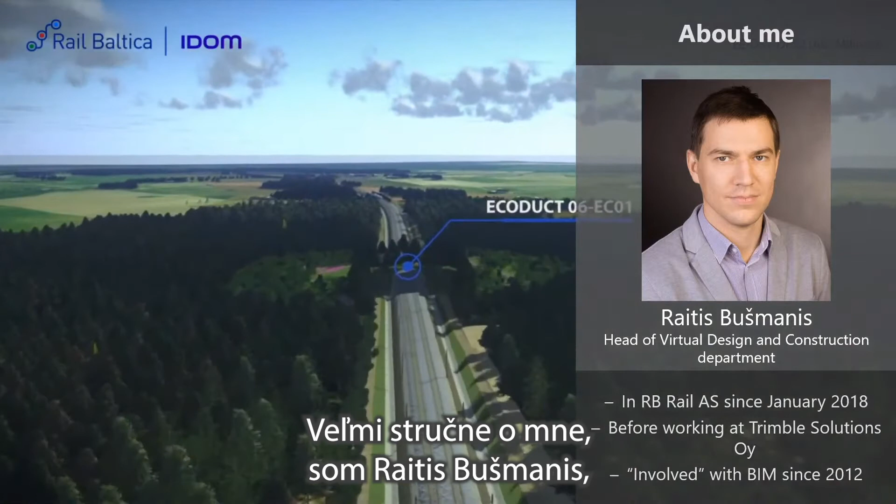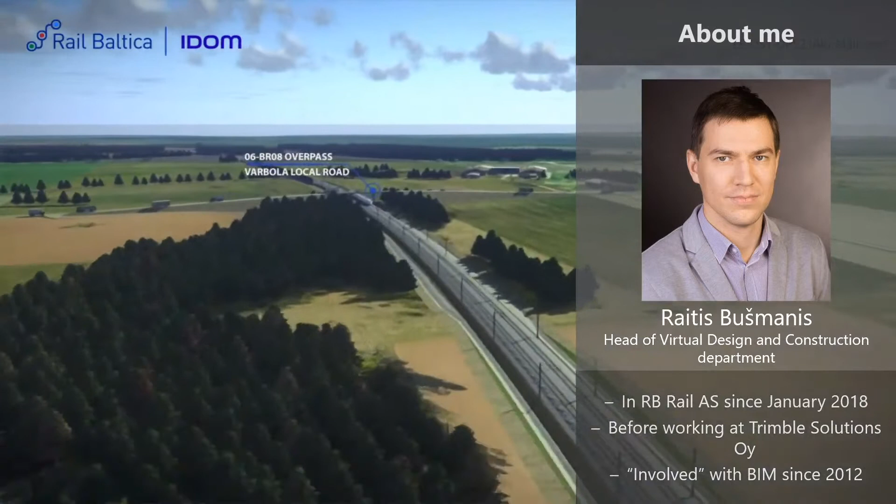It does, great. So very briefly about myself, I'm Raitis Bušmanis, head of virtual design and construction department in RB Rail, who is the coordinator of the whole project. I'm there since January 2018, and before that gained knowledge in Trimble Solutions and also working locally with different BIM tools all around.

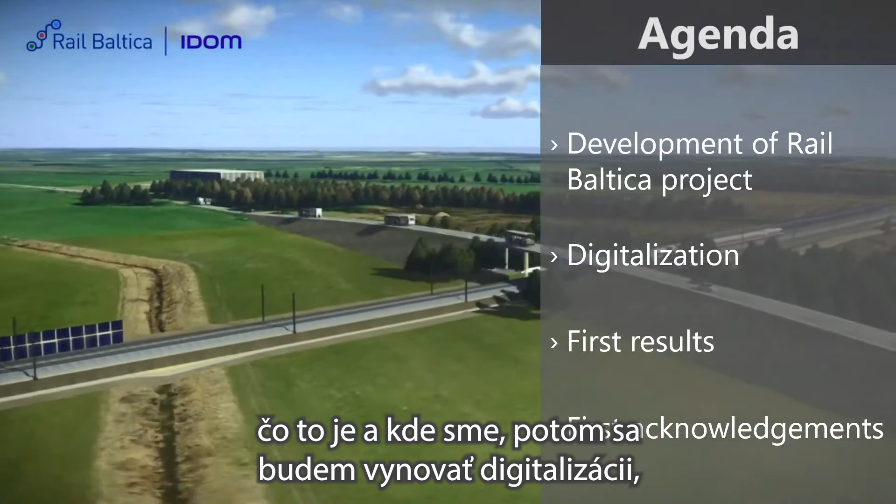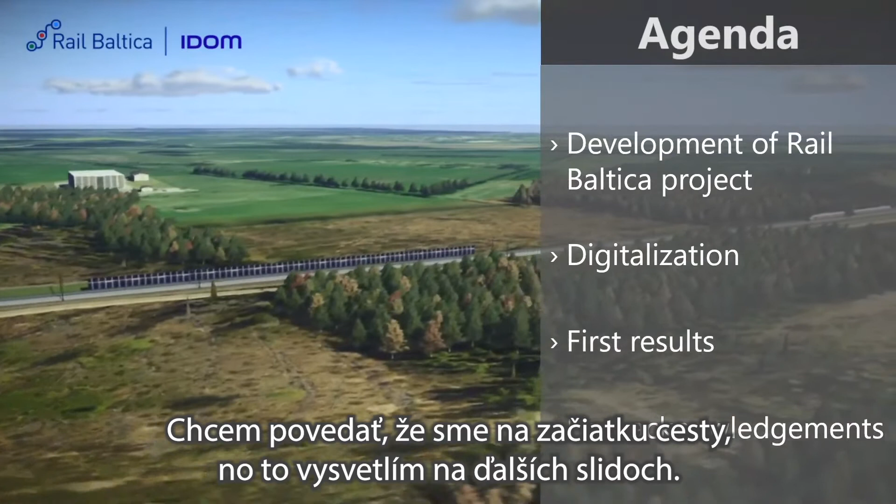So I'm going to talk a little bit about the development of Rail Baltica project, what it is, where we are. Then, of course, focusing on the digitalization. And then I'm going to talk about some first results that we have received and also first acknowledgements. I just want to tell you that we are in the beginning of our journey, but I will explain that in the next slides.

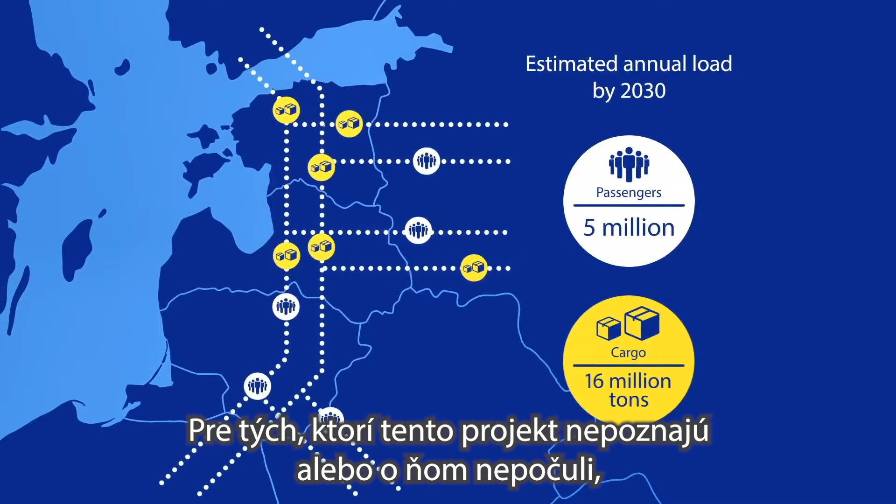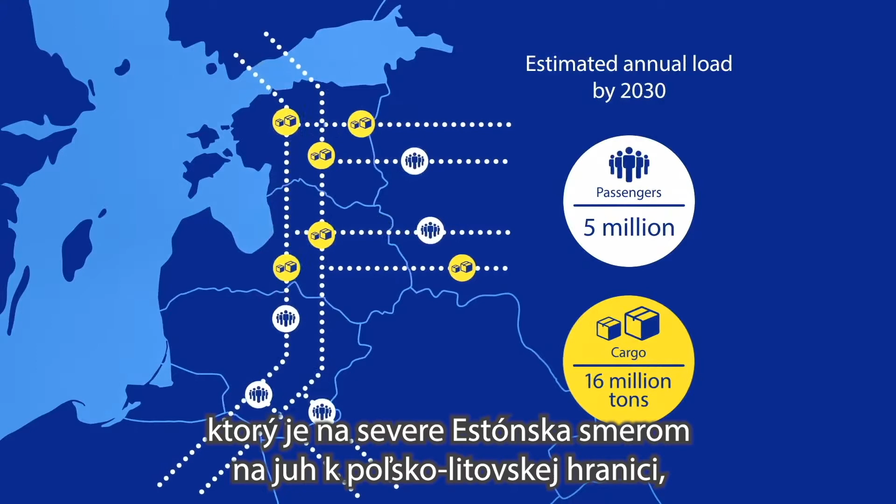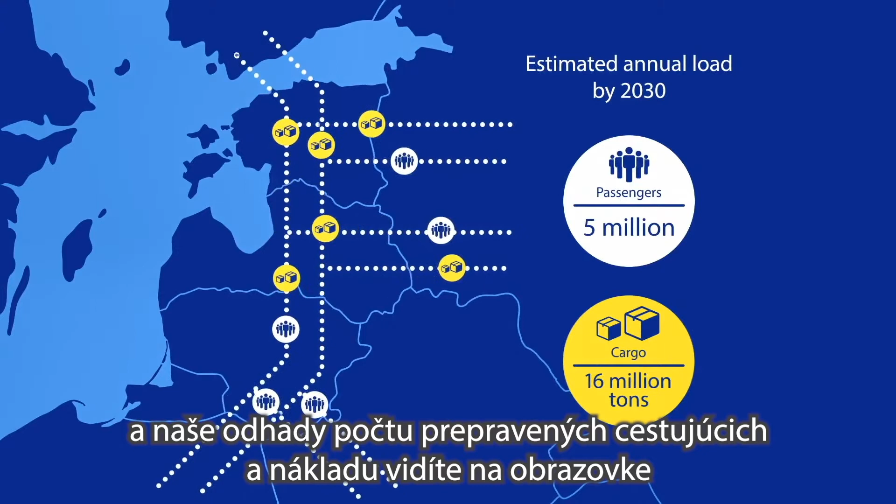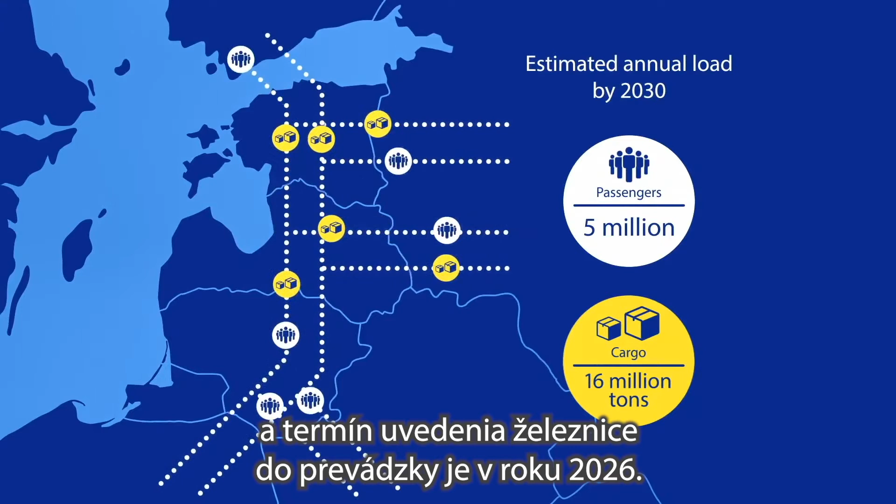So development of Rail Baltica project. For those who are not familiar with this project, it is a high-speed railway project spanning from Tallinn, which is in the north of Estonia, down to the south to the Polish and Lithuanian border. Altogether, it's something around 870 kilometers. Our estimate is, here you see on the screen, for passenger and for cargo flows, but also the rough estimate about the deadline of the project, it should go live and operational by 2026.

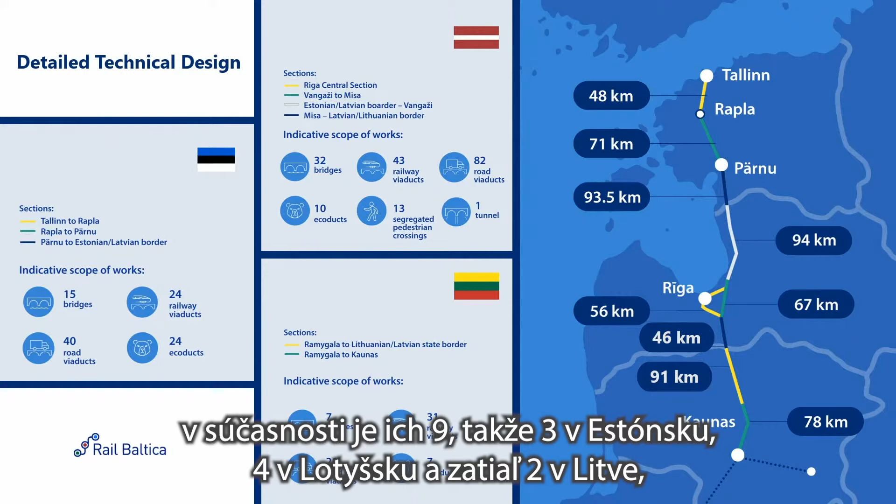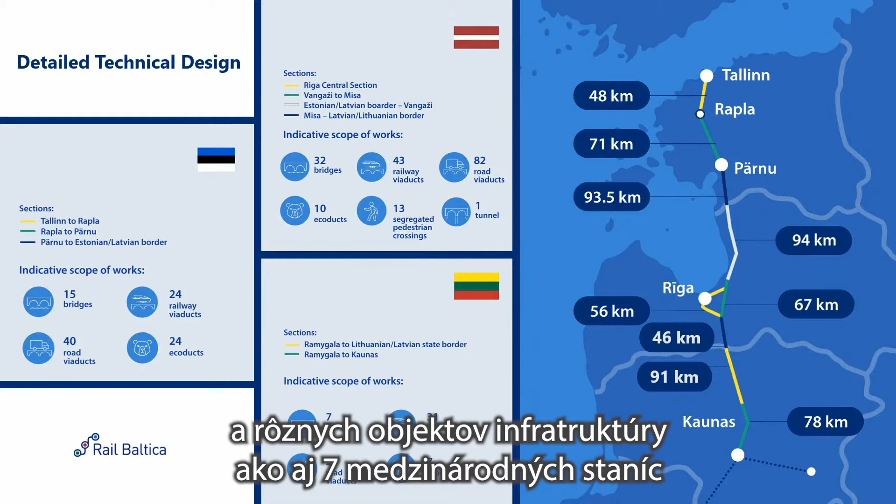So here are a little bit more details. We have split the whole design into smaller pieces, what we call design sections. Currently we have 9 of them: 3 in Estonia, 4 in Latvia, and currently 2 in Lithuania, but there will be 2 more in Lithuania in the upcoming years. There's a vast amount of bridges, structures, different kinds of infrastructure objects, as well as 7 international stations, along with multimodal terminals and other infrastructure facilities required for the operations of the railway line.

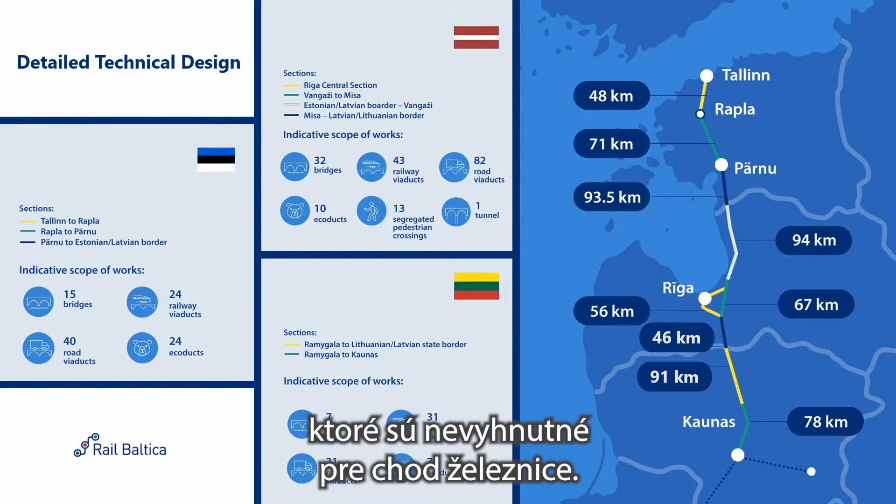And this is not just the Baltics, or one Latvia, Estonia, Lithuania project. This is a whole Europe's project. We have many different companies from all around Europe participating. Currently, mainly we are in the design phase, and the construction phase has begun in some places already, where certain objects are already in the construction phase. Very soon we hope to begin construction works in Riga Central Station, as well as the mainline construction will follow very soon after that.

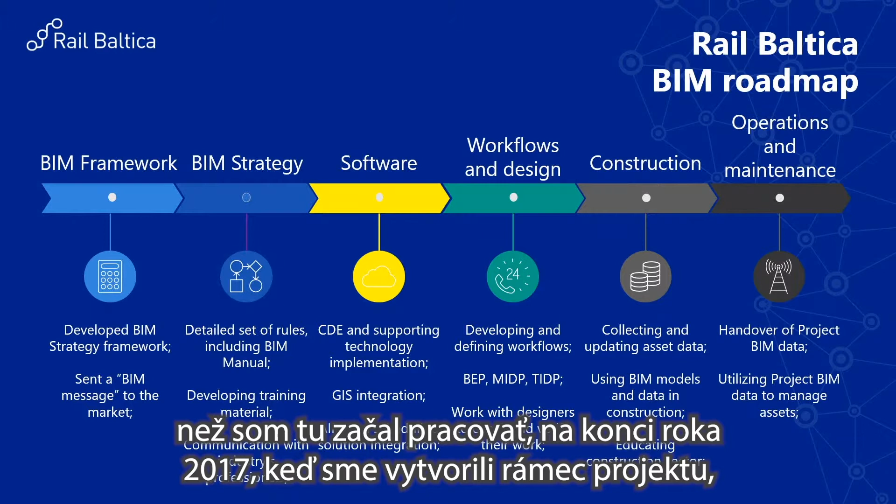So about the digitalization, or why, what, and how we are trying to implement and do. We started our BIM journey, as I like to call it, back before I even joined. It was end of 2017 when we started with our framework. Then followed the strategy, so we set out the rules of how and what we want to implement.

Then we procured the software for client needs, what we need. That includes a common data environment, and it also includes some other tools which we need for verification and reviewing of the design, because we are the client, we are the public client. There are different other contractors and designers working for us, and we have to stick it all together. For that reason, we need all kinds of software technologies, also GIS, which is very important, and I will touch that topic later.

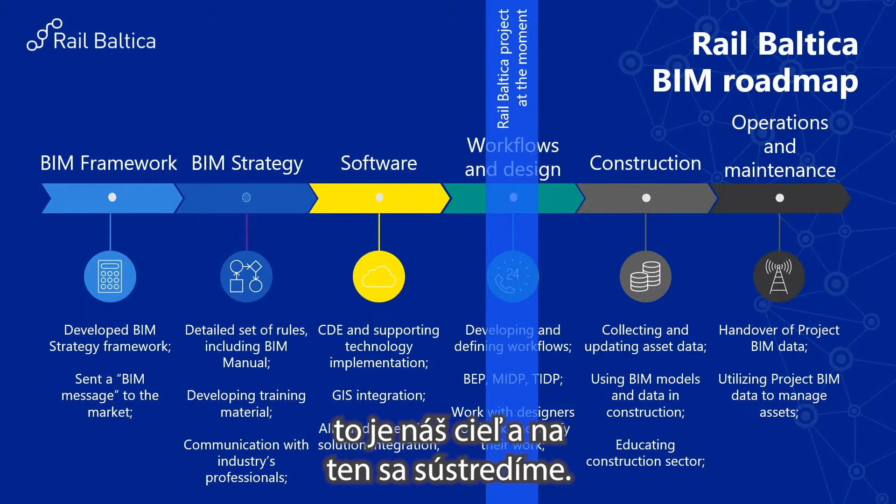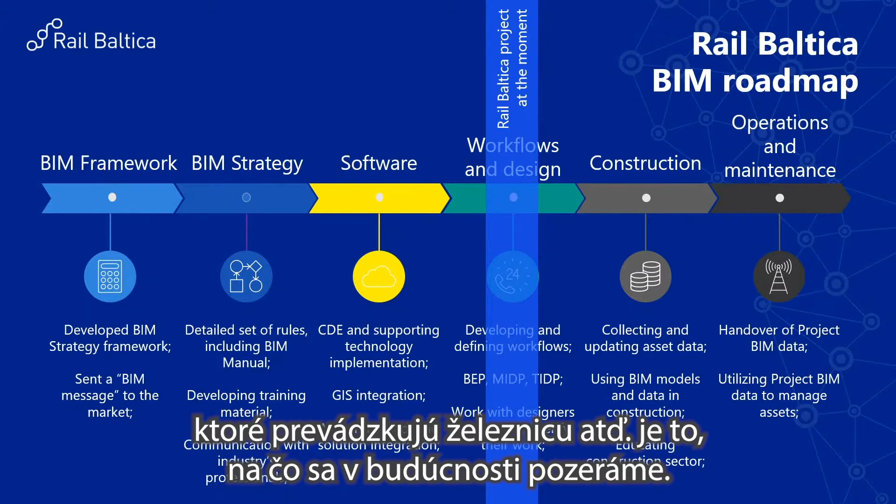Just to highlight, I would say that we are currently somewhere here: the design of the mainline is ongoing, the design of stations and other facilities is ongoing, and very soon we'll enter the construction stage. So we are preparing, I would say. And the preparation and everything is actually tended towards the operations and maintenance. That is our goal, and this is what we are trying to focus on. The design is good, the construction is great, but the target is operations and maintenance. This is where we go with our strategy, because the maintenance of the assets, maintenance of facilities, operating the railway, etc., that is something we are looking into in the future.

But when we developed our documents and our strategy, we put it basically public. It's public information, it's available on our website, anyone can go and download it. This was also something we tried to use to engage the market, so that they would understand that this strategy and these BIM workflows are coming for this project. So be prepared, embrace yourself, and be ready.

About the common data environment. I don't know, unfortunately, the Slovakian language, but from what I understood from the previous speaker is that...

Basically, we are building this common data environment, and it is not just one solution. There are different modules, if you call it that way, for this solution. And for different purposes, we use different software, and the goal is to get it integrated.

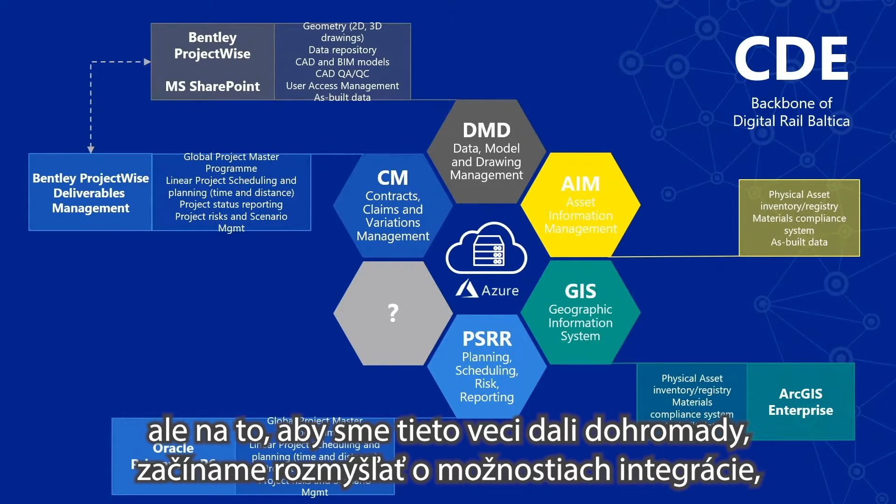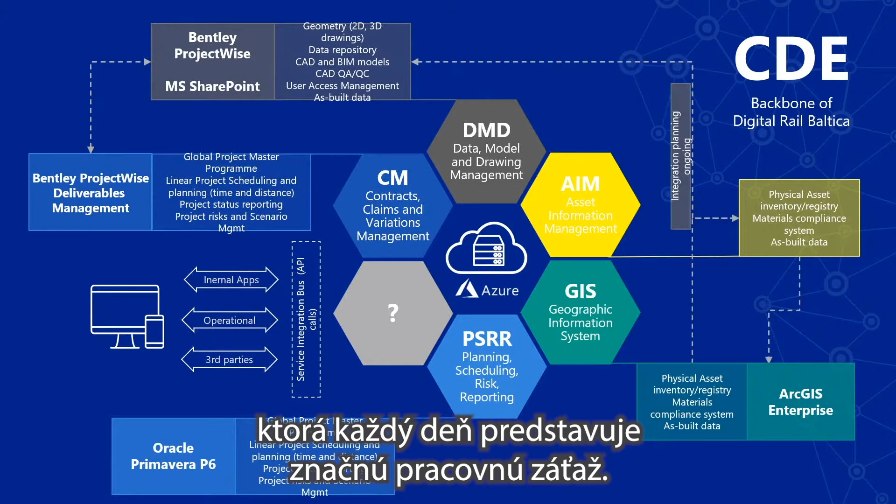This is where we are currently starting to develop our plans and look into these directions, because each and every software is good at certain stuff or certain things to do, but in order to put it all together, we are starting to think about the integration possibilities and how to reduce this manual work, which is taking a lot of workload on a daily basis.

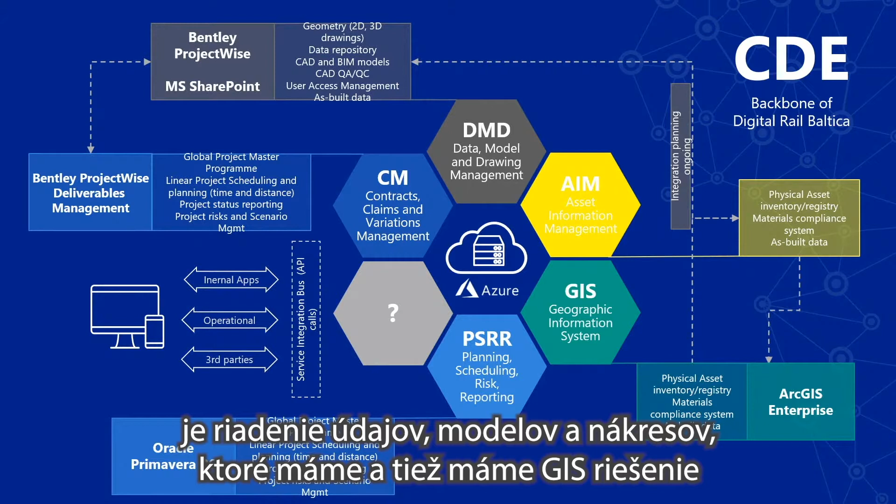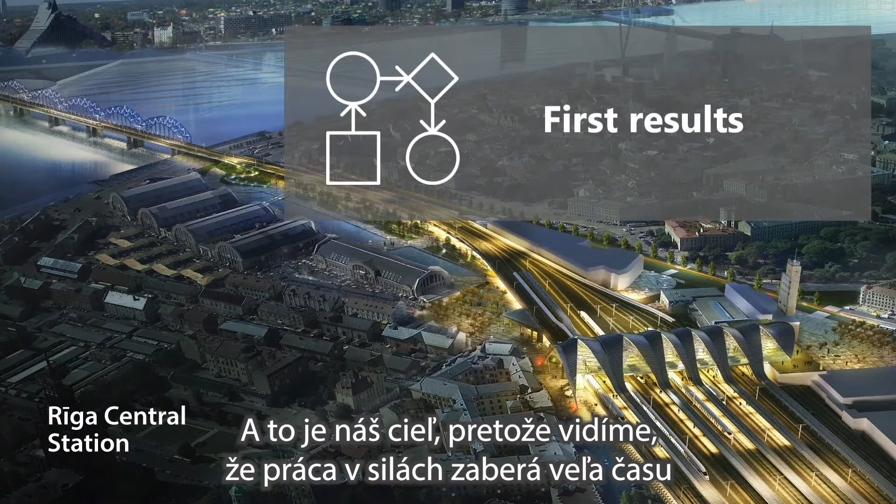One of them is this drawing model and data management solution which we have in place, and then we have the GIS solution in place, and how to merge that, how to get the best of both worlds out of it. This is our target, because we see that working in silos takes a lot of time, and there's a big risk of losing information.

When I talk about the results, I just want to say that our design, if we speak about it, includes site investigations, value engineering, master design, and detailed technical design, or in BIM language, LOD 200, 300, and 400.

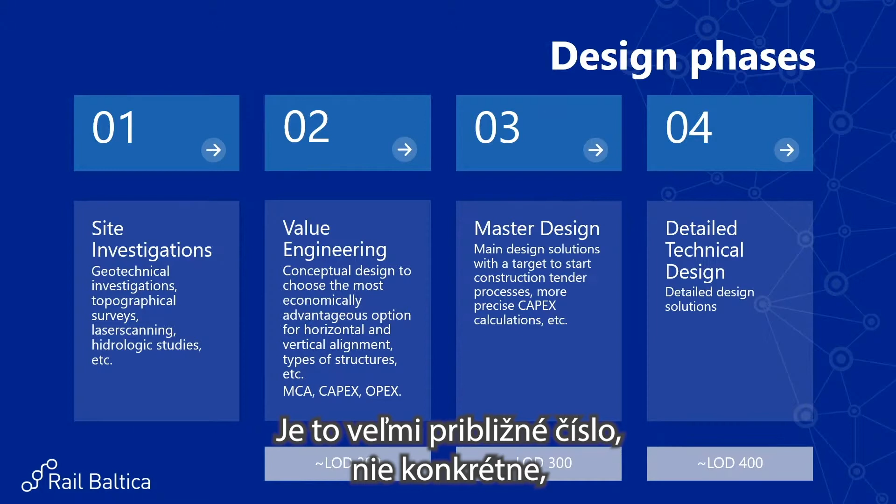This is a very approximate number, not detailed or specific, because there are bits and pieces here and there. But this is sort of the target number, so that everyone is on the same page of what we are trying to achieve in each design stage.

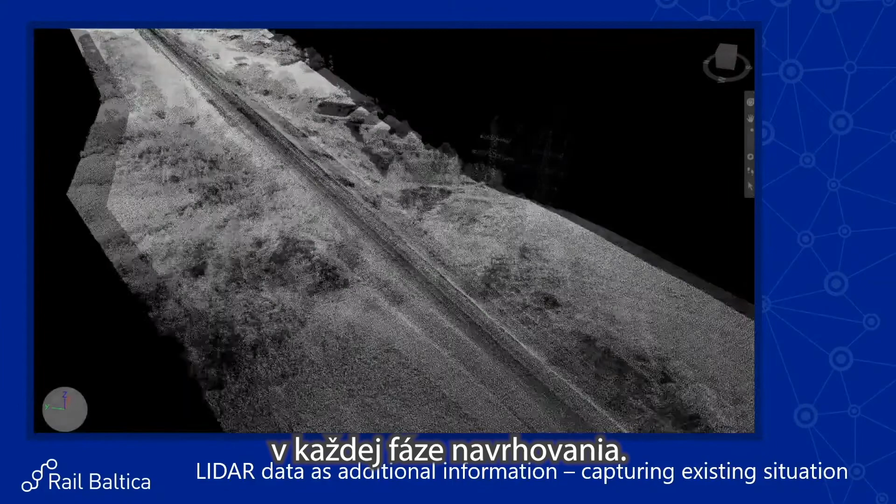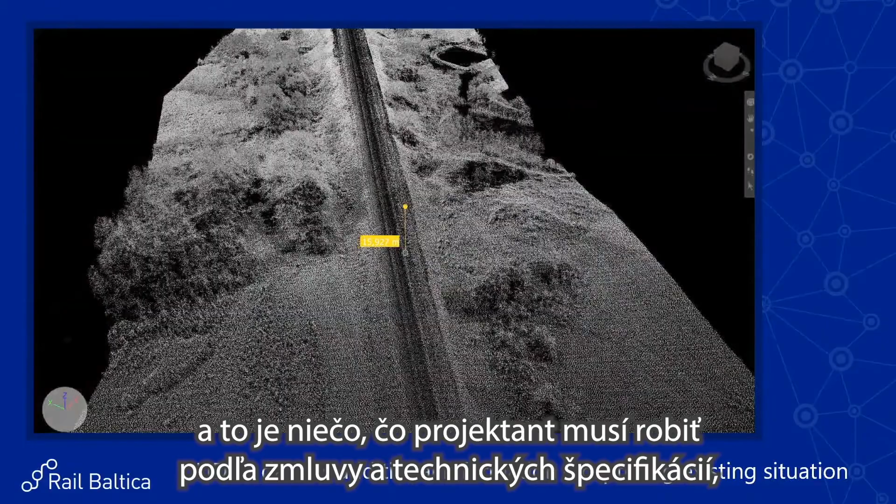Now, this is just an example of site investigation data, and this is something the designer has to do according to the contract and technical specification - to use these LiDAR scans as an additional source of information in order to get as accurate input data as possible when they do the design.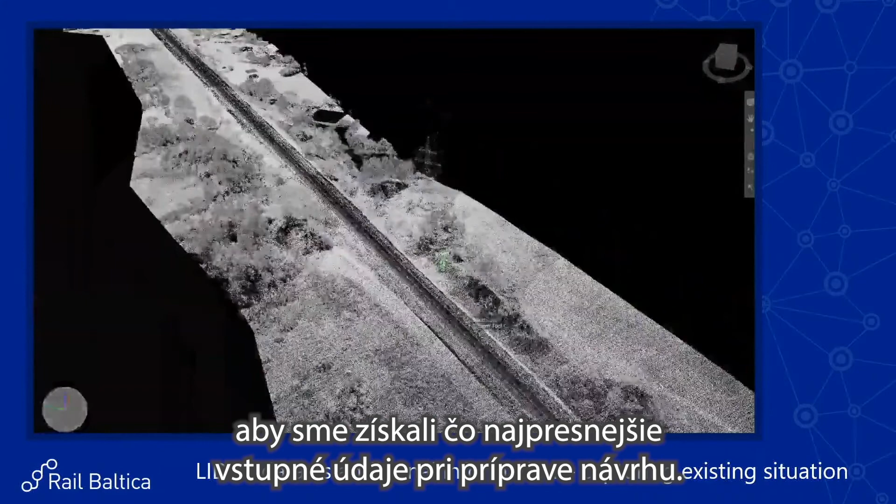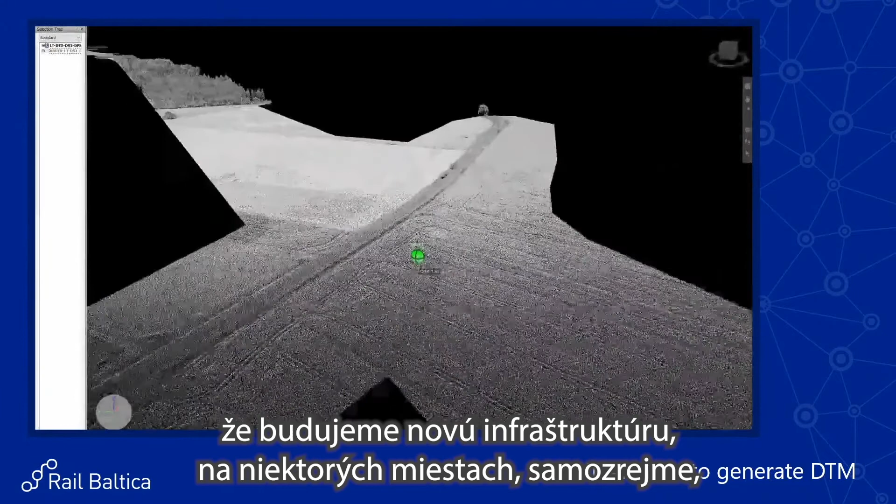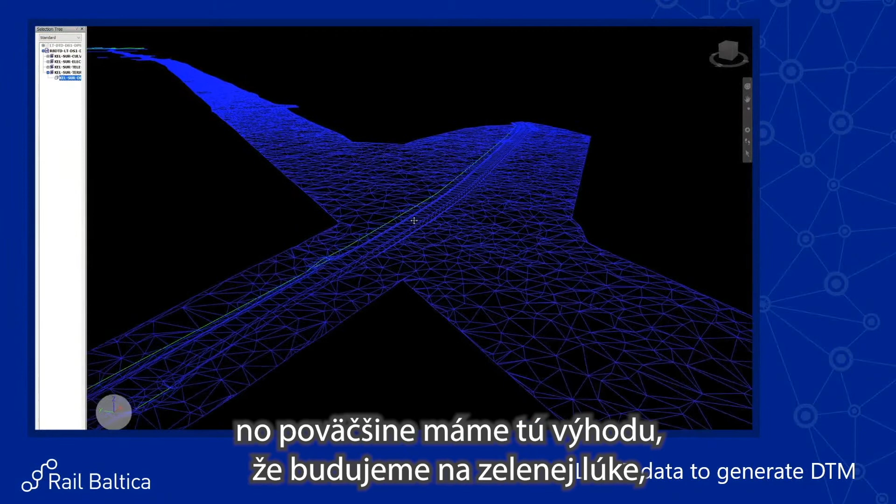One thing I didn't mention is that we have the privilege of being a greenfield project, so we are building new infrastructure. In some places, of course, we have interface with existing railway infrastructure, and also with different other networks, such as utilities, road networks, and so on. But in the majority, we have the privilege of building a greenfield project.

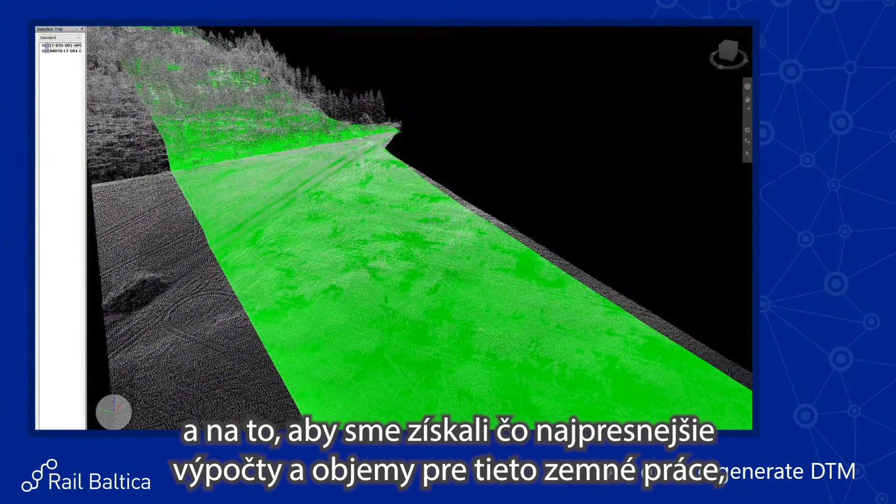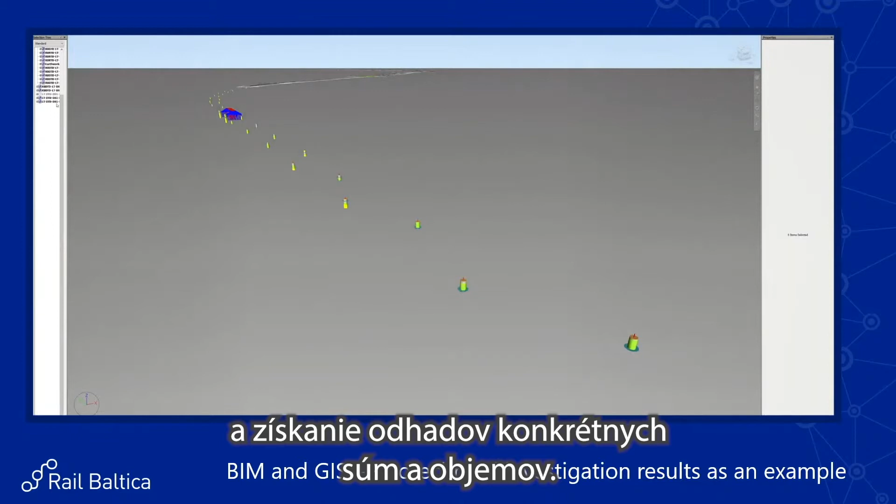But that is why input data is very important, so that it would be possible - for example, there will be a lot of earthworks, and in order to get very accurate earthwork calculations and volume calculations, this kind of solution helps us and helps the designer to obtain and use it for volume calculations and get better estimates about the amounts and volumes. This is another case of combining the best of different worlds.

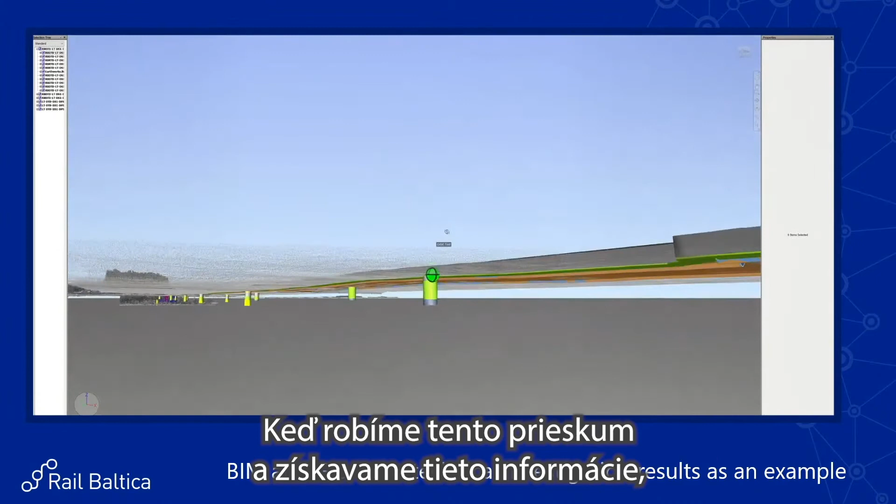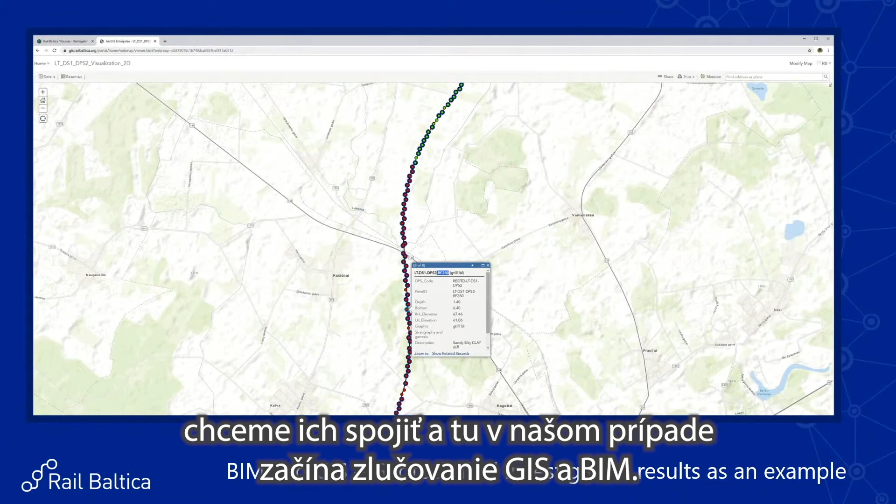This is about geotechnical information. When we do investigations on the site and gather this information, we want it all put together. This is where the merging between GIS and BIM in our case starts - we put the GIS data, the BIM data, into GIS.

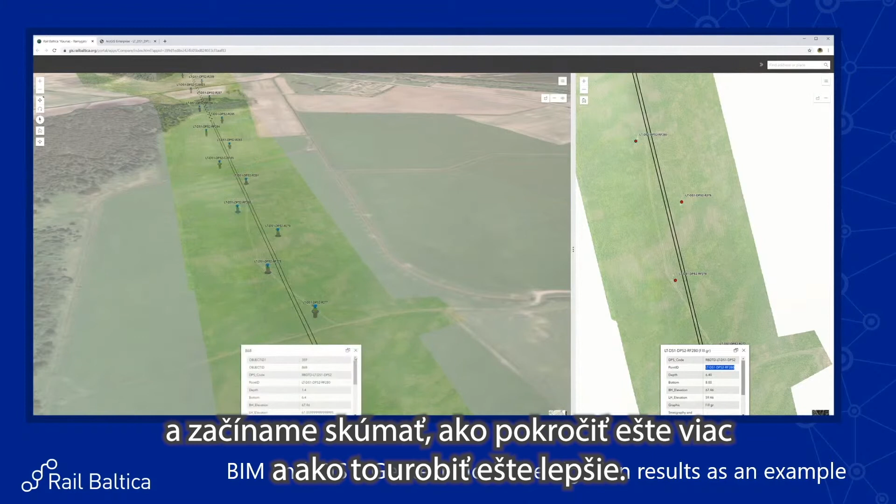So we have the best of both worlds. Now we are looking into exploring this even further, how to advance and make this even better.

And GI data, representing it in different aspects, like getting information about the boreholes done and what is the progress from the designer.

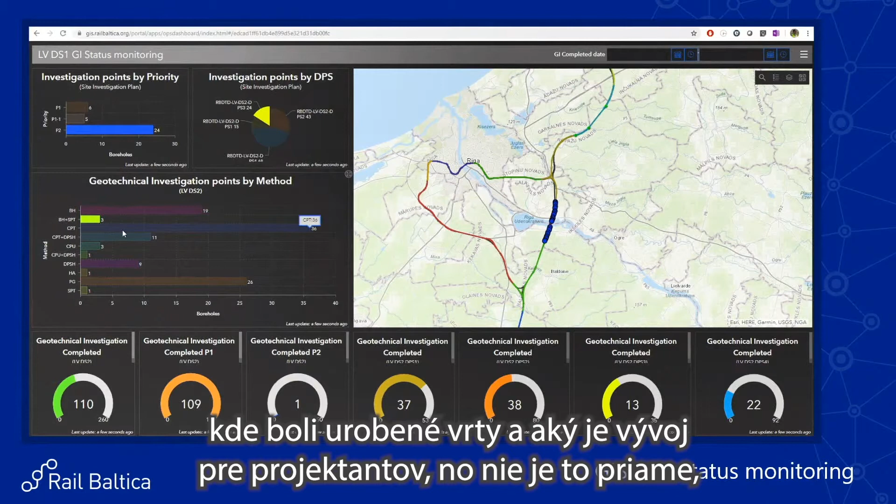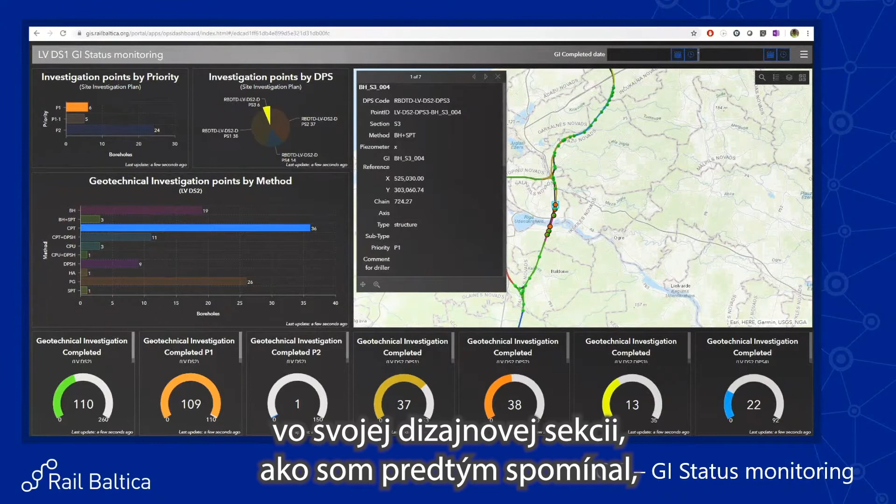Now, this is not like a direct thing where the designer or geotechnical team goes to the field and fills in directly - they submit their reports and we put those reports into the system, and thus the project manager can follow up the progress overall, what is happening in his design section, which I mentioned before - 9 design sections. So what is happening in each design section and how to reuse the data.

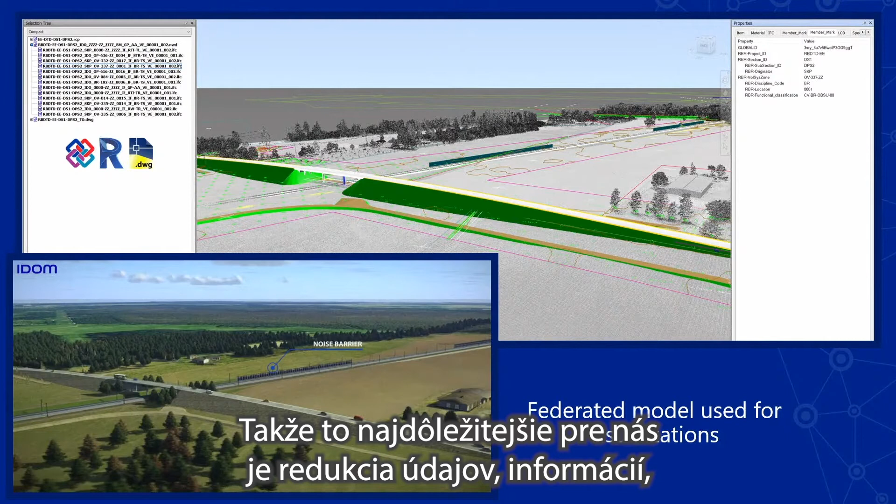So I think the most important part is reuse of the data, of the information. This is the goal - not the 3D model, not the quantities separately. We can't look at those elements separately. It's about reusing the information.

And if the information is structured and unified in the same way, then we can reuse it in different platforms, different solutions, and so on. So unification of information is, I think, the key which we are trying to achieve.

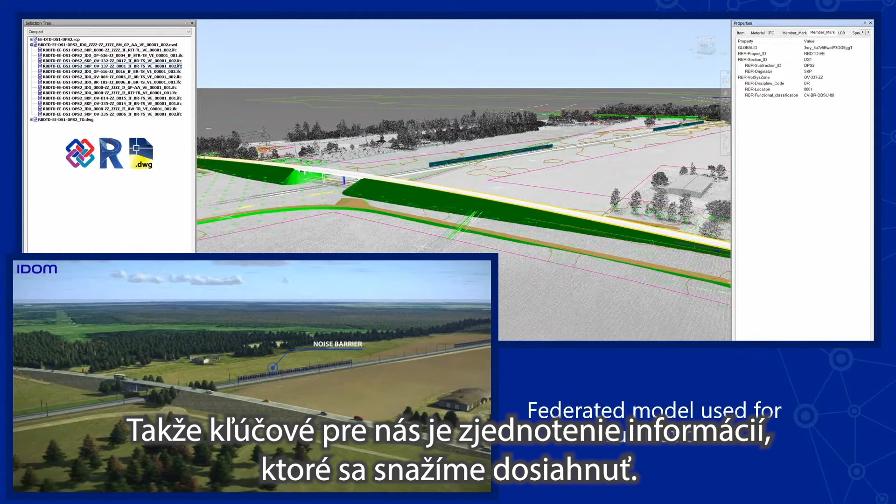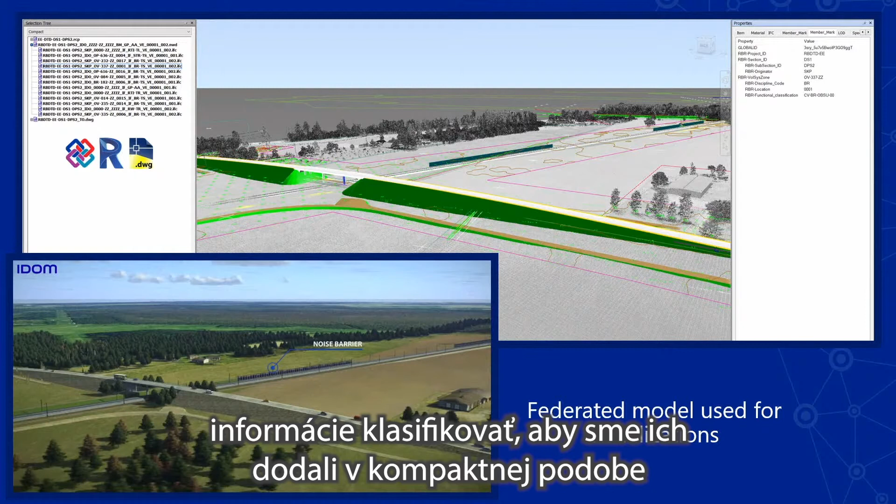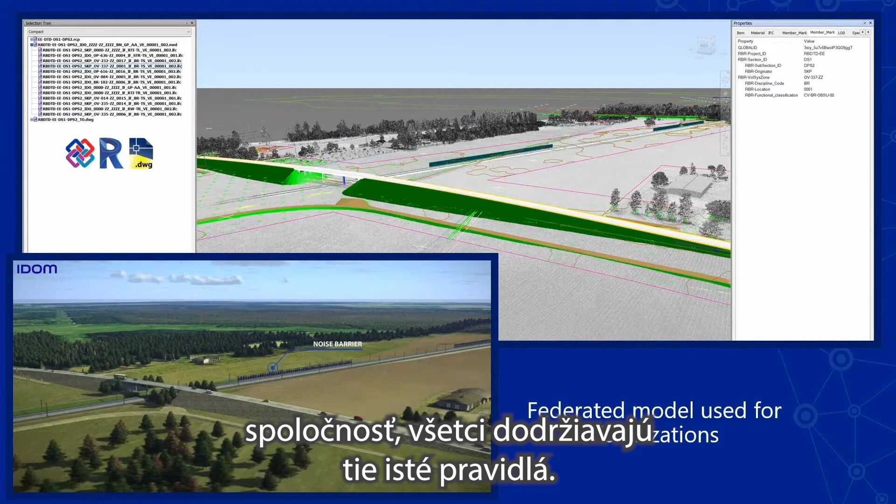I'm not saying that we are fully there, no, but we are trying to go that way, that we classify, we categorize the information so that it's delivered and compacted in the same manner. It doesn't matter what kind of a designer it is, it doesn't matter what kind of a company it is, but they all follow the same rules.

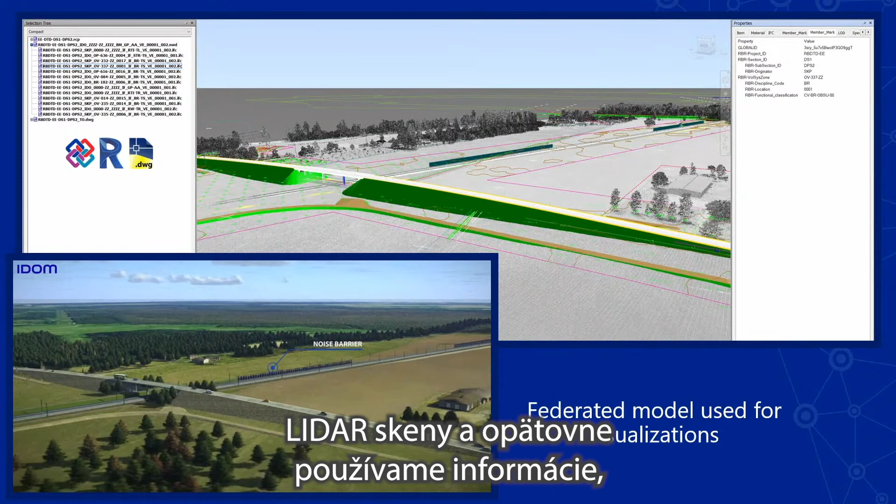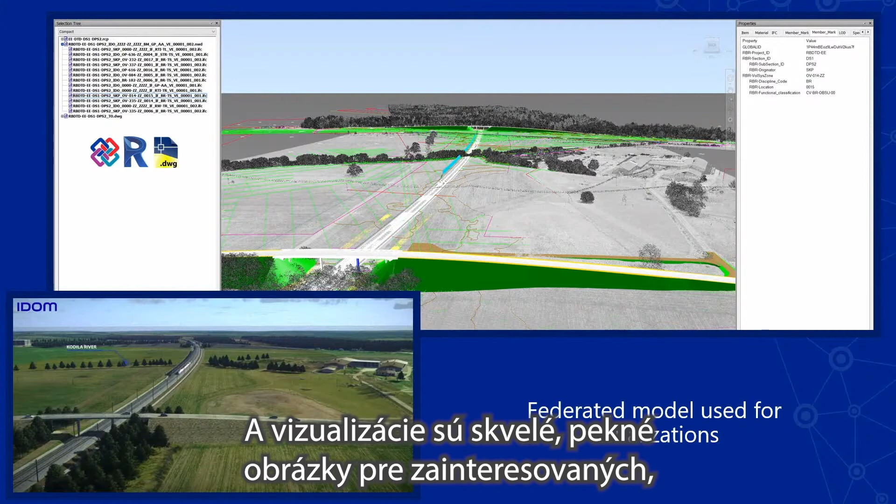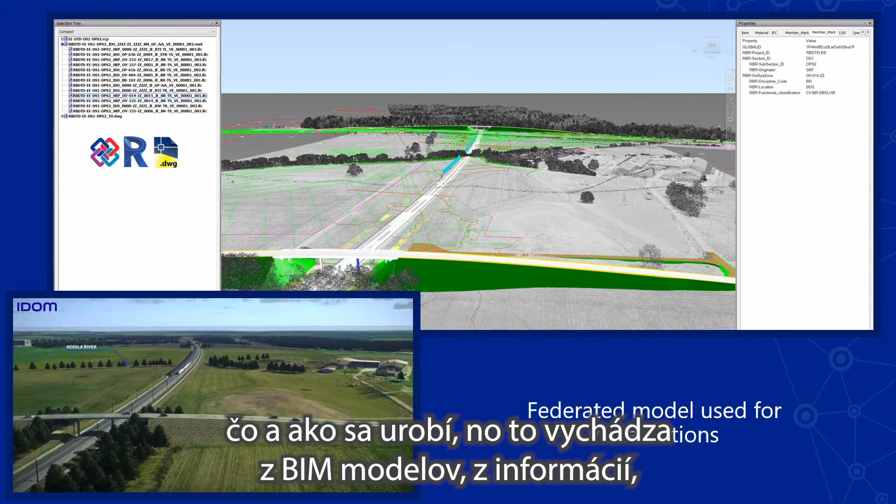Here's another example, like a federated model with different disciplines, with the LiDAR scans inside, and to reuse information again to create a visualization. And the visualizations are great, nice pretty pictures for stakeholder engagement, for the municipalities, for the public, to communicate what will be done and how it will be done. But this comes from the BIM models, from the information we have gathered throughout the design process.

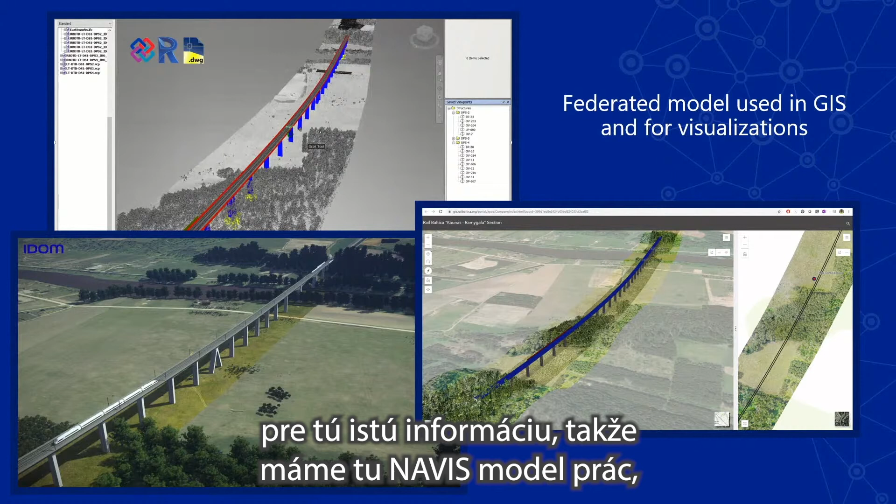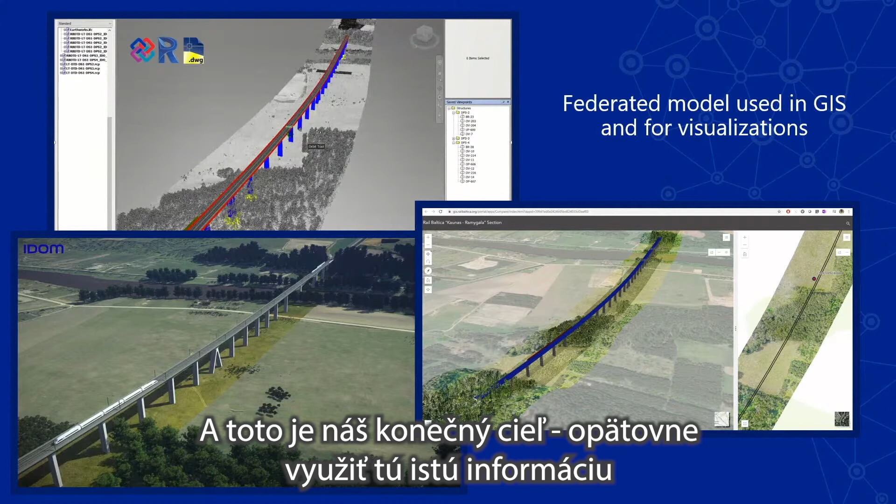Here's another example of reusing different solutions for the same information. There is a Navisworks model, which is like a work model. There's a visualization on the bottom left, and on the bottom right there's a GIS interpretation - not interpretation, but actually taking the same data, putting it into GIS and unifying it all together. This is our ultimate goal, that we want to reuse the same information in as many places as possible.

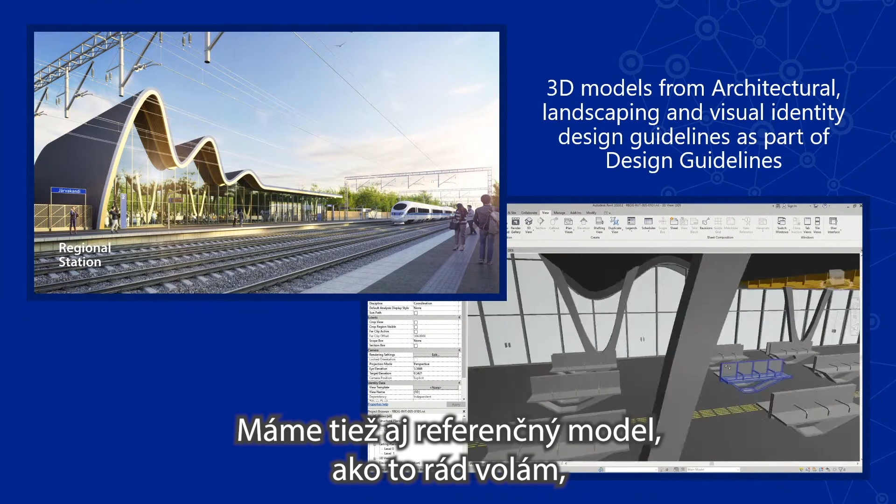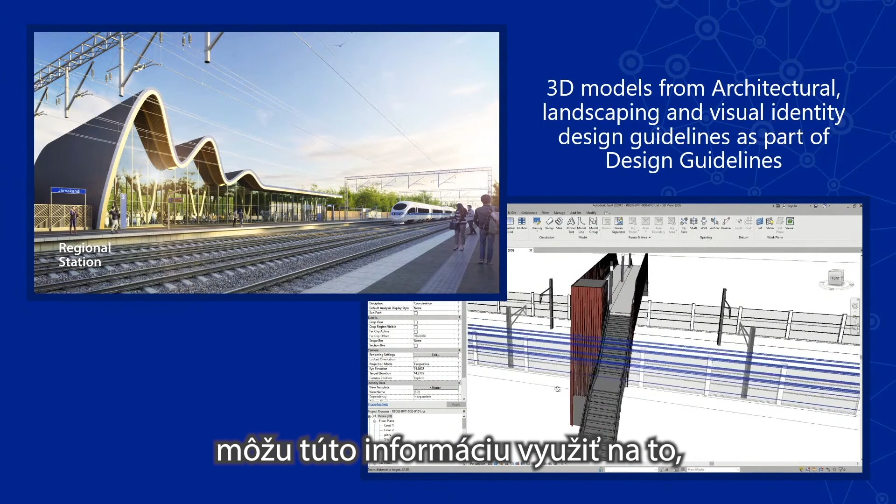I put this here because we can reuse the information again. So we have regional stations and guidelines, for example. What we also have is a sort of reference model, if you like to call it, that we can give to the designers to use in their projects. So it's not a complete structural or full design model, but it's at least a reference that they can use, that they can follow, and they can reuse this information in order to comply with our requirements.

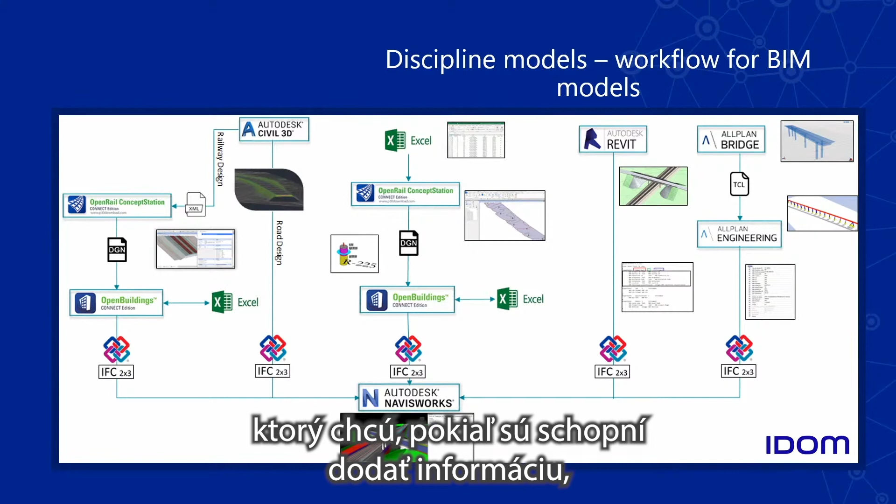But of course, it's nice pictures and everything, but behind the scenes there's a lot of work to achieve this, because as I said, information is the key, and to get there using different tools, different methods, and to unify it all together takes a lot of effort. There are a lot of workflows because the maturity of different softwares, design authoring tools, is very different. We have allowed our designers to choose the best appropriate tool they want, as long as they can deliver the information in the formats and scheme that we need and want.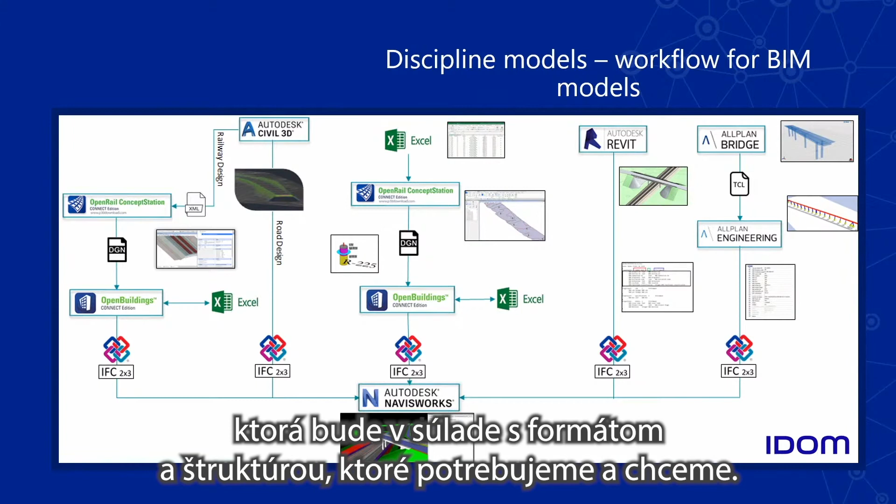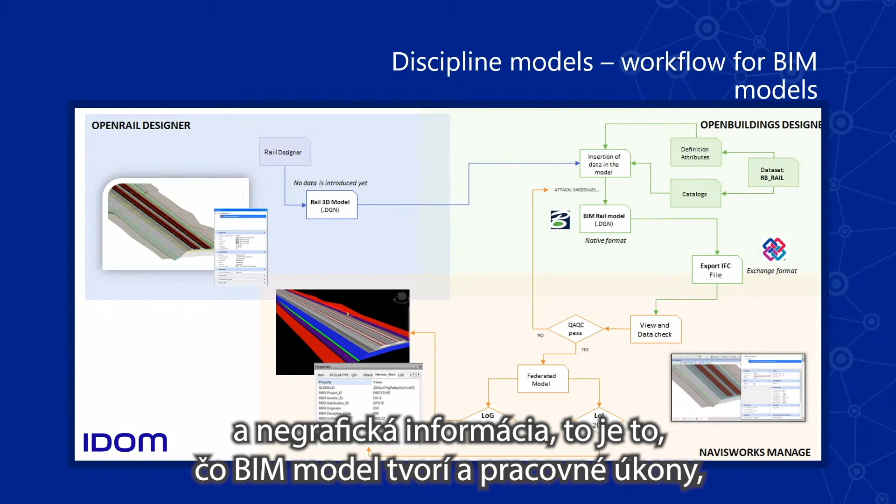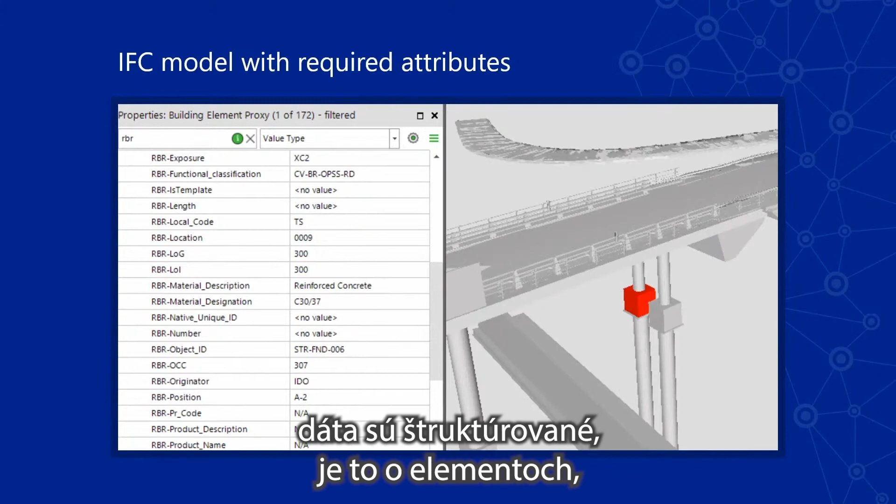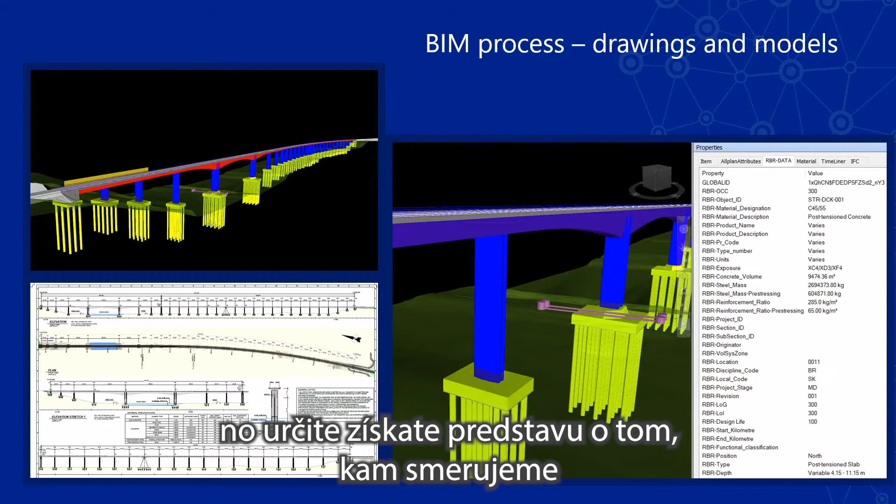This is one example. Here's another example of how the design model becomes a BIM model. The information that comes together with the model, the graphical information together with the non-graphical information, this is what creates the BIM model, and these workflows show how to get there. Just an example of how this data is structured about the elements in our models. Due to security reasons, I had to remove some information, but you can get the sense of where we are going and what kind of model examples we get.

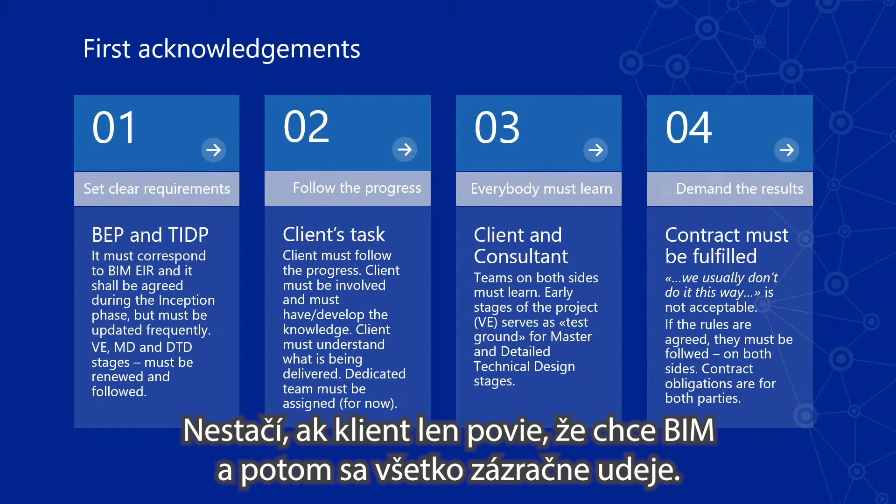And just to conclude my presentation, as time is ticking, literally ticking in my ears - there are certain things that every party involved in the process needs to follow. There has to be clear requirements. There has to be some kind of progress report and progress checking from the client side. It's not enough that the client just says, I want BIM, and then everything happens magically. No, there has to be engagement from both sides, and everybody must learn, because the technology is developing, and you have to demand the result.

If you are a client, you have to understand what is happening. You have to understand why you need it. You have to understand what is the purpose of the information you are collecting, and that is the reason why you have to be engaged. You need to have a strong team behind it to do that. Certainly the amount of flexibility, and also following the big picture, as I said, and understanding what is there.

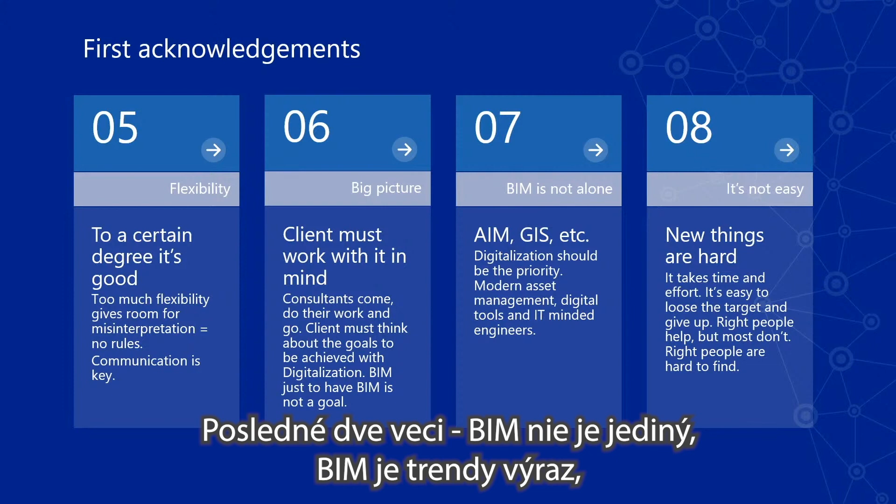And the last two things: BIM is not alone. BIM is just a buzzword that has been used and reused very, very many times in the last couple of years, but there are many different solutions that go together with that. And GIS, as I said in my presentation, I think it's a very important thing to think about and look at. And this is not an easy process - it's a learning curve for everyone.